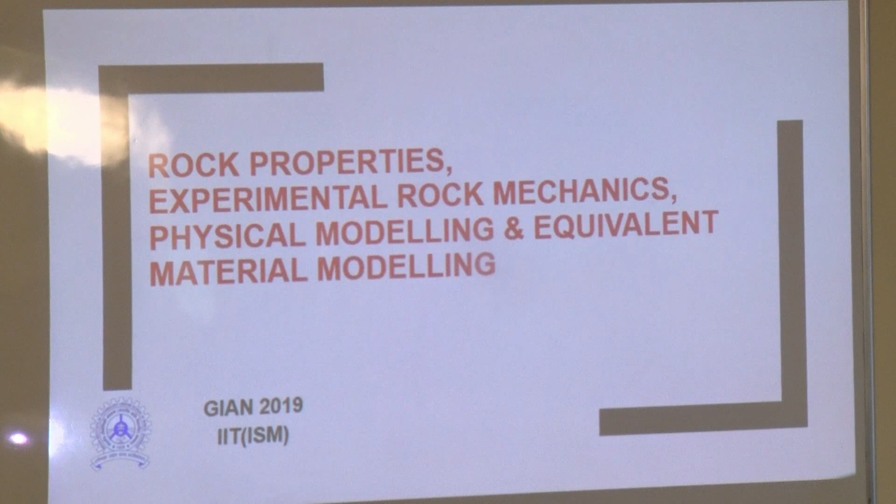This is our second lecture. This lecture we will concentrate on rock property. What is rock and what are the rock properties? Because in rock mechanics we need to know the behavior of rock in different conditions - different stress condition, different thermal condition, different electrical signal condition. That is mostly what geophysicists are dealing with. So before moving to that, we want to get a glimpse of what is rock.

I am a mining engineer, so we will deal with the rock that we generally mine: coal bearing strata, country rock, and different open pit and underground mines. In India, majority of our reserve is coal, and coal has a bearing country rock of shale and sandstone. So if we want to mine a coal mine, we need to know the behavior of coal, sandstone, and shale, so that we can design accordingly.

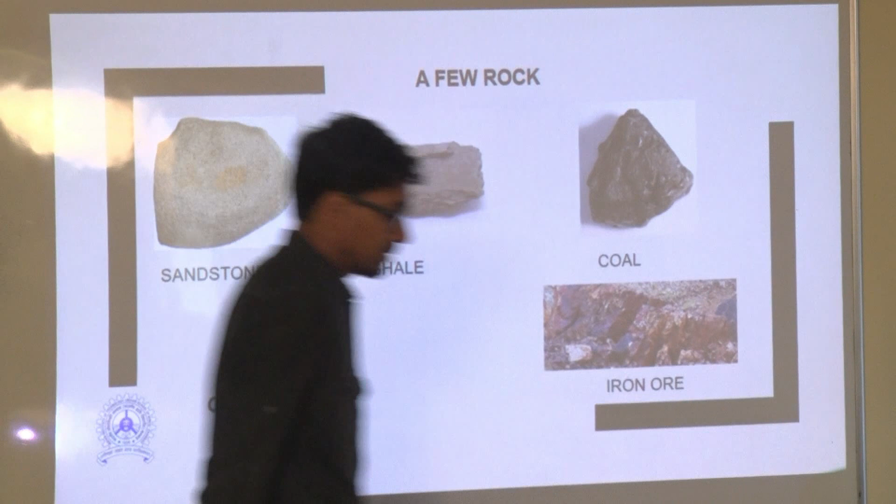Because when you do mining, you need to erect a new structure on rock. So you have to interact with the rock with machines, drilling and blasting, explosives, and numerous different mechanical procedures. So it is very essential for our rock mechanics course to know the rock.

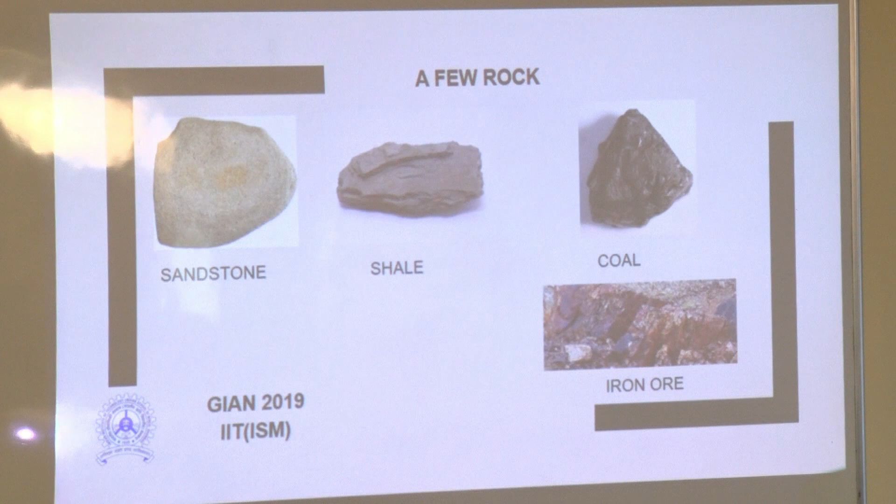That primary work for this task is done by the geologists. They collect rock, they detect what type of rock it is, what type of possible behavior the rock will have. So that task is generally done by the geologists.

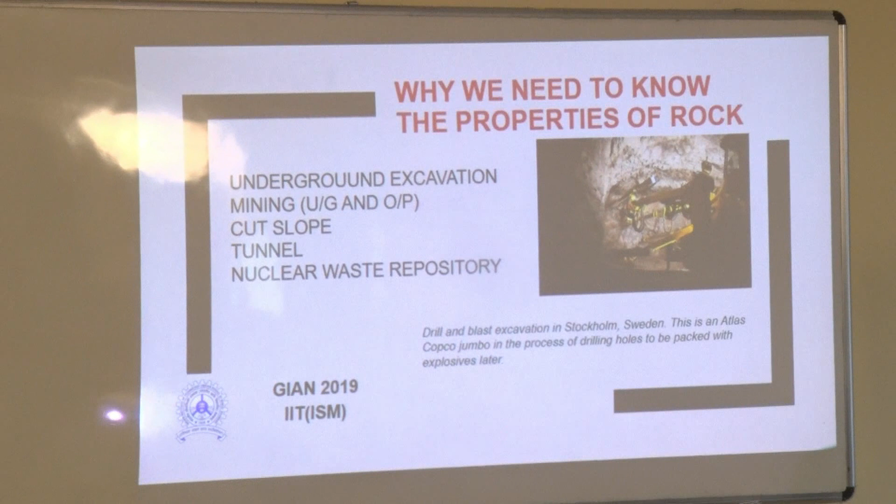Now, why do we need to know the properties of rock? In mining, we need to build underground excavations. This excavation may be used for nuclear waste disposal as well as other waste material disposal. Not only that, but also for underground space reserve. So to build the underground space or excavation, you need to drill.

So you need to have an idea about the hardness of the rock. When the drill bit cuts, what will be its performance, how much it will advance at a daily rate, which type of explosive you will use, whether it is a hard rock or soft rock, or whether the rock bearing strata has presence of water. Based on that you will design.

So it is very important for which purpose you are going to use rock mechanics. Based on that purpose, your different procedures will change.

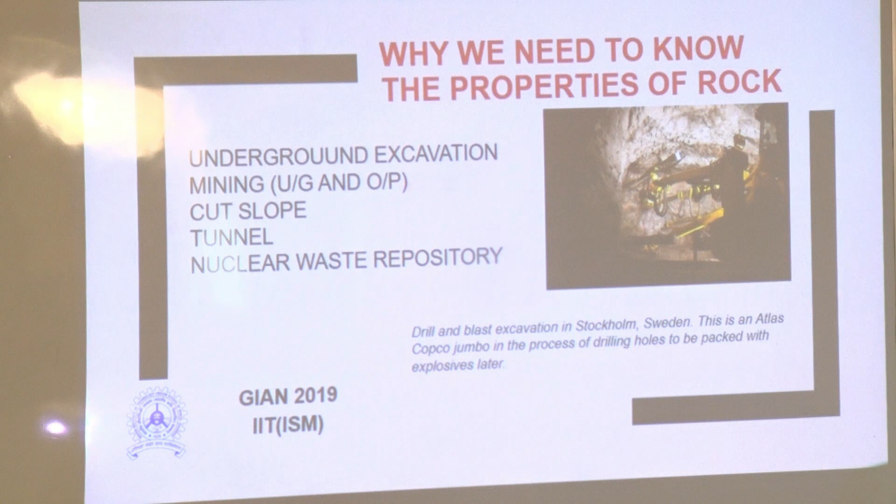Second, in mining, majority of the ore is extracted by open pit mining and underground mining. Open pit mining is from the surface itself - you excavate the material using drilling, blasting technology and different mechanical procedures. The surface miner is one continuous mining method used in open pit. Continuous miner is used underground, and there are different rock cutting instruments used in underground as well as in open pit mining.

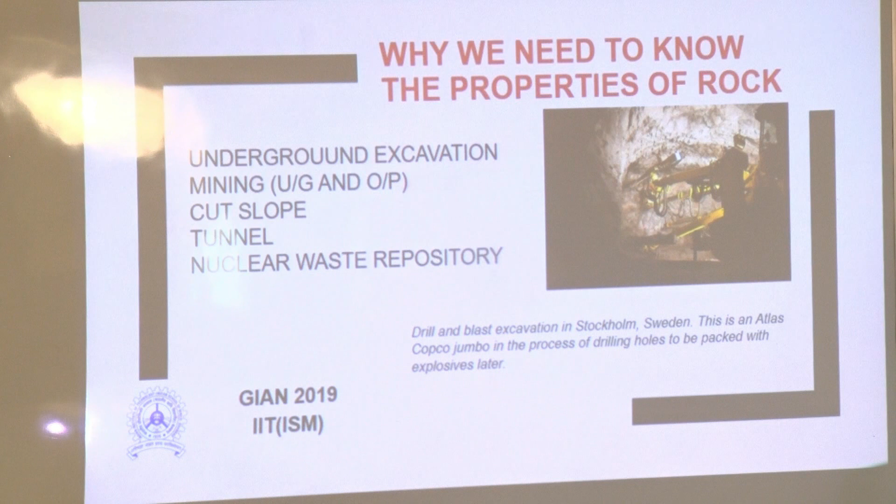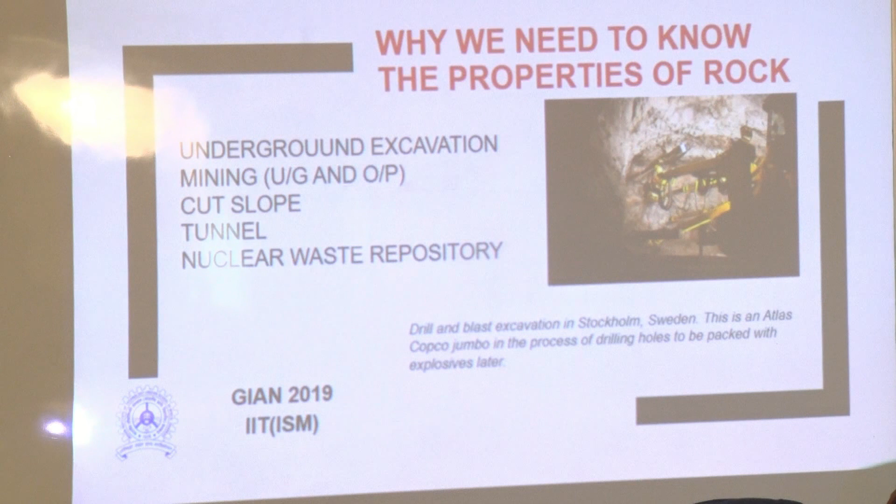Third, in majority of the Himalayan region there is a problem of slope stability and slope hazards. When we build a national highway along the Himalayan range, we have to design the cut slope. Whether the cut slope will be stable or unstable depends on the designer - how you blast it, how you design the slope. For that also you need to know the mechanical behavior and response of rock under different conditions.

And last, as I have already told you, the nuclear waste repository is a very important study. It has been done by different countries to know the rock behavior under different temperature conditions, because rock behaves differently in different temperature conditions.

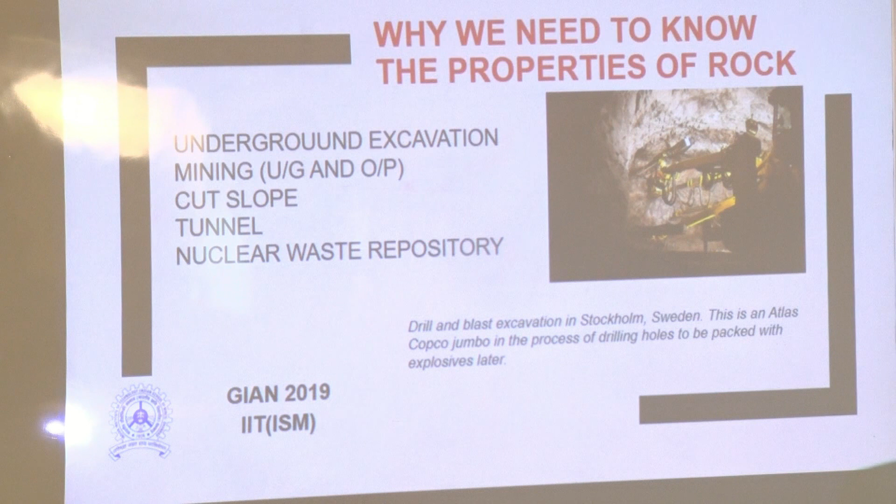In coal mining, in this procedure, we drill and blast, then muck the material and transport it to the surface. In that procedure, we need to design the gallery through which we approach the mineral - meaning the path or road. That gallery should have some amount of breadth, width, and height.

So the design will be based on the rock behavior and rock characteristics. We have already laid down different regulations that will dictate what should be the size and shape, but that is basically based on the rock parameters. So to design an underground mine, you need to know the mechanical behavior, and that is why rock mechanics is very, very necessary in that condition also.

Now, these are the aspects a mining engineer deals with, and that is why they need to know the mechanical behavior of rock in different conditions for their urgency, for their requirement, and to fulfill the industry requirement. And we all know coal supplies the majority of the energy in our country. So that is why performance, production, efficiency and safety of the coal mines is very, very necessary, and rock mechanics will help you to design these.

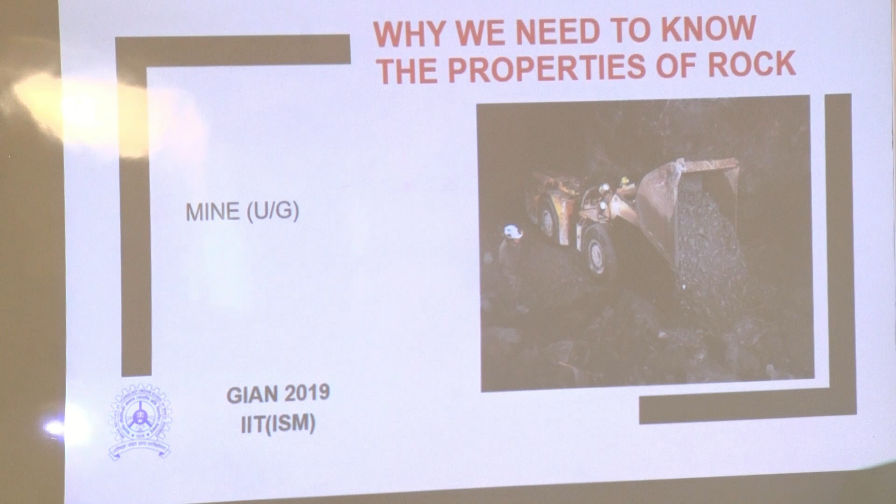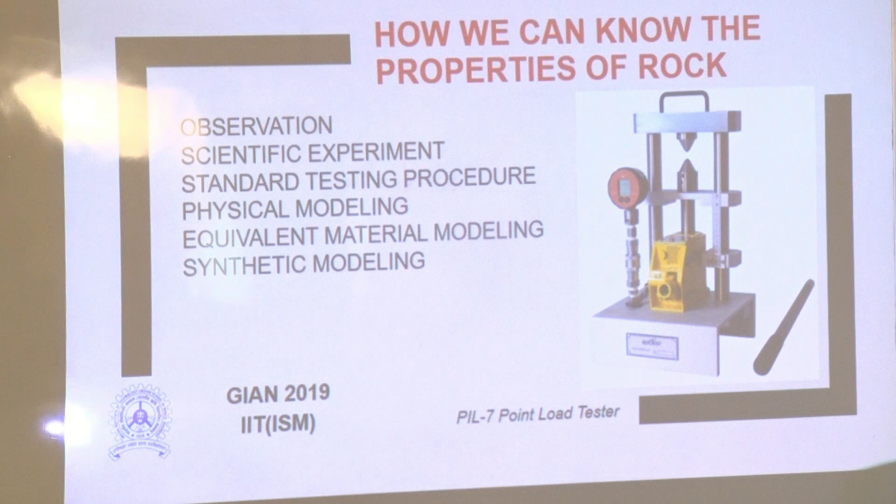I will show you one picture. In mining, there is a general practice. Mining sardars and mining engineers carry a kind of rod, basically a lathi made of wood. When they are going through the path, they strike the wall, they strike the roof, and feel the sound. Sound tells something about the rock. Rock behavior changes over time. So observation is very, very important.

Because in the first class you have already seen rock behavior when material is ductile or brittle. In brittle it is very difficult, but in the ductile case it deforms slowly. So definitely there should be some manifestation, and that manifestation may be in the form of sound waves. Some creaking sound may come, and very good engineers can feel the sound: yes, there is some cracking sound, means there is some process of cracking going on.

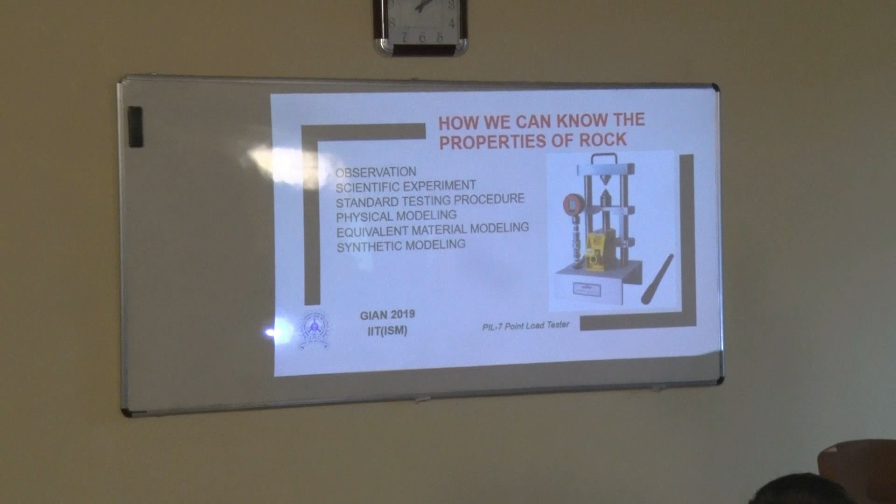Not only that, when people examine the wall of a mine gallery and observe some spalling material coming off, they will predict that this pillar, this wall, is already under stress. If it is not under stress, the wall should be very smooth. Material already spalled means this portion is under heavily loaded condition that the rock cannot bear. So these observations are very fundamental for rock mechanics engineers. You need to develop that eye, those ears, to observe the behavioral changes of the rock in different conditions.

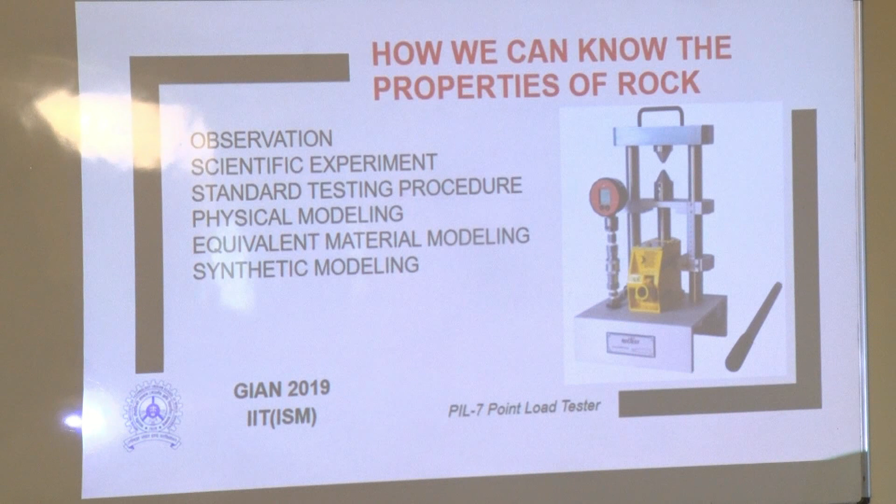Second, this observation will tell you something about the characteristics of the rock. Then you need to test, because testing is basically a tool to help you know the characteristics of the rock. Generally, we test materials. Suppose we test our blood to know whether my fever is due to some virus or some bacteria, and the test confirms, yes, your fever is due to malaria. So that test helps you diagnose what the problem is.

Similarly, for rock, a scientific test procedure will help you know the internal properties of the rock. So this testing procedure should be very scientific, meaning there should be some causal relation between the cause and its manifestation. That procedure should be very rigorous and reproducible. What I test in this place and what I test in Calcutta, both test results should be the same.

And for this, throughout the globe, there is a uniformity of opinion. That is why standard procedures have been developed, and ISRM and ASTM are among them. They provide manuals on how to test rock in different conditions, what precautions and care you have to take, and what the limitations of those tests are. These standards will tell you about this.

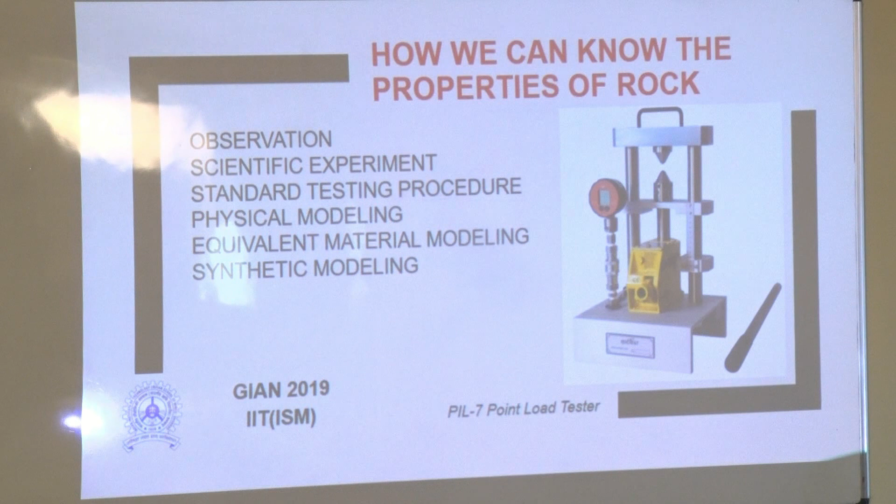So this is one of the machines to test the point load. Generally engineers always carry some rod while they are visiting an underground cavern or mines, to test whether we are moving through a safe zone or a very susceptible zone. So sound will speak everything.

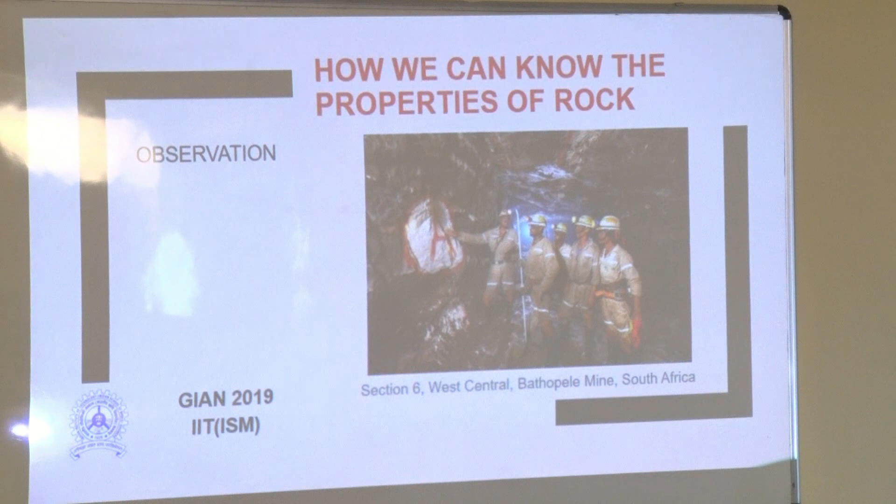Now, from the observation, what engineering perception will we get? Generally in rock, we have already learned that rock has undergone different stages of stress and strain for millions of years. We do not know. But some process the rock has undergone means there should be some amount of signature. Fossil is that kind of signature; it will represent how many million years, what type of species was there. Similarly, this kind of orientation of the rock will give you an indication of what kind of stress and strain the rock has undergone.

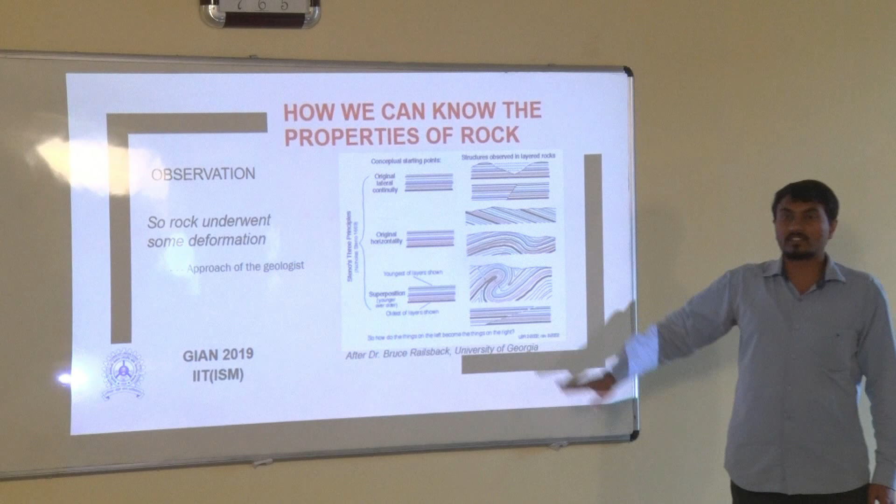So the geologist's interpretation would be, yes, rock has undergone some amount of deformation. Which direction, they will find out, then based on that they will classify whether it is anticline, syncline, dike, fold, whatever. So the geologist's role is very, very important in rock mechanics. Geologists, mining engineers, civil engineers can play a collective role for the development of rock mechanics.

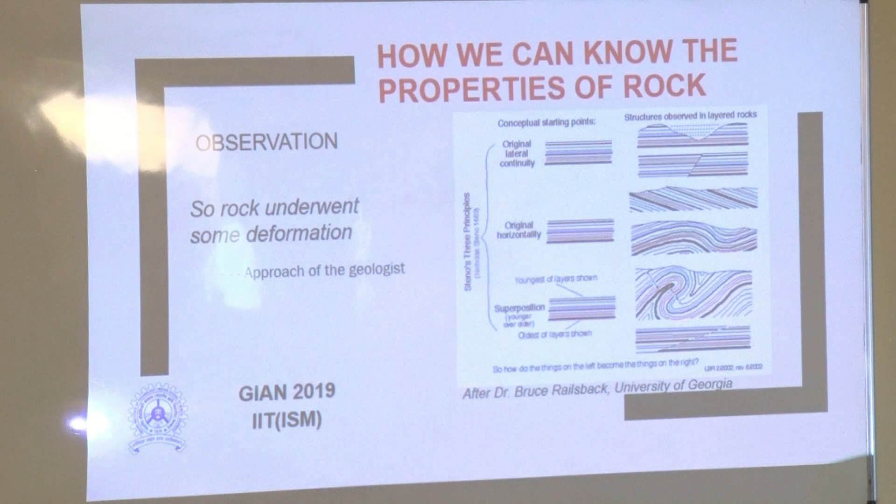But what will mining engineers and general engineers do? They are basically looking after the magnitude and the direction, because the direction is very important. Because when we erect a structure, the structure should be oriented in such a way that it will fall in a favorable zone. So, as an engineer, we are always looking after not only magnitude, but also the direction.

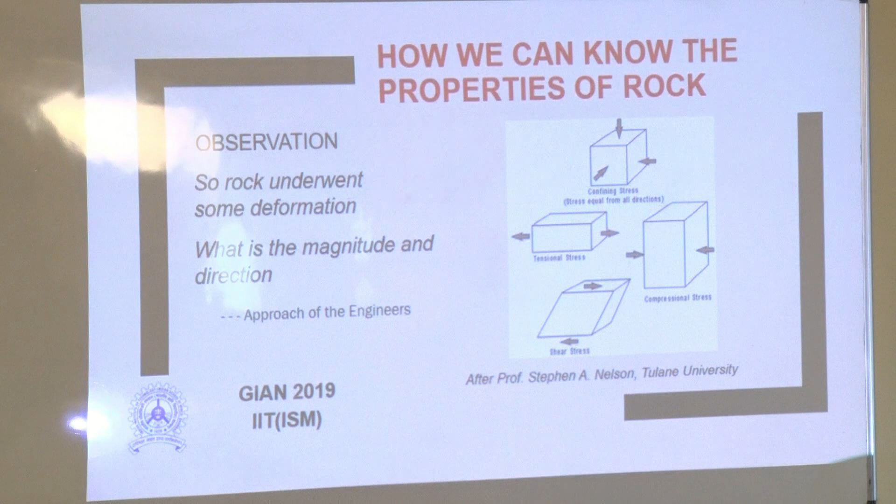So, as an engineer, our geometrical conception should be very clear, 2D as well as 3D, so that we can visualize how a rock block will behave in different orientations. So, this is very, very important from the observation part as well as from the engineering point of view. So, the second point I have already dealt with.

We have the blue book, orange book from the ISRM where they have laid down different testing manuals. We have the soft copy. If you like, you can collect it. And tomorrow when we visit our laboratory, we will show you different testing methods, at least a few.

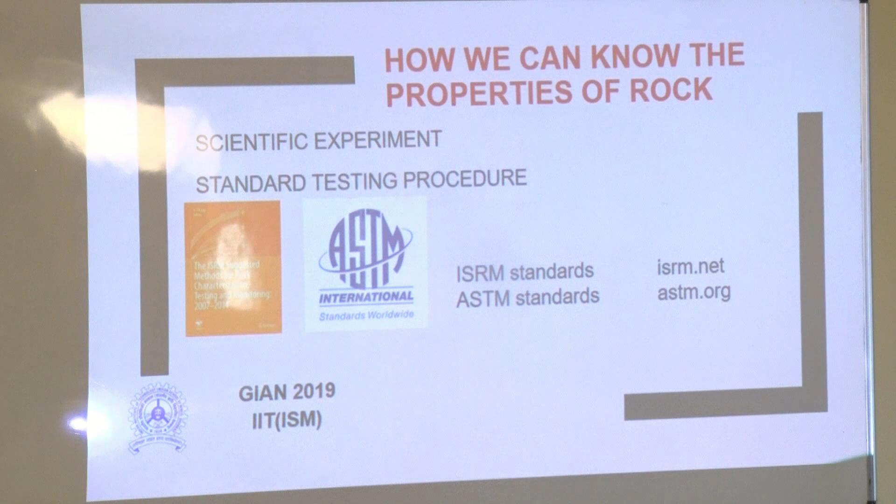But in this testing, there have been many controversies for many years. What should be the size of the samples? What kind of machines will you use? What should be the stiffness of the machine? Based on that, you will choose the rock and test the rock on that machine. What should be the ratio of the length to diameter? So, there were a lot of controversies for a long time, and we finally came together with a uniform decision that we will maintain an L by D ratio greater than 2.

So, these conclusions have taken a lot of time. Experimental rock mechanics has played an important role in coming to the conclusion of what should be the ideal size to test the rock. So, all that we are learning is actually the result of the labor of 40 years, 50 years of different people.

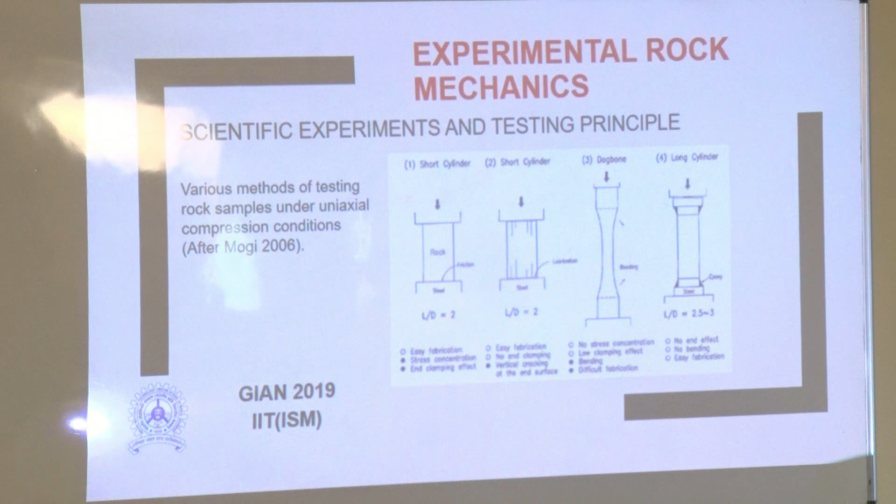So, in this aspect, in rock mechanics, we have to determine, we have to estimate different parameters. And we know that rock is not homogeneous. So, rock is anisotropic. So, as anisotropy increases in different directions, your different constants also increase.

For a perfectly isotropic rock, you have to determine only two constants; Young's modulus and Poisson's ratio are sufficient. For transversely isotropic, 5 elastic constants are sufficient. For orthotropic rock, 9 elastic constants you have to determine. For general anisotropic, 21 parameters you have to determine to characterize the rock.

So you can understand, as the regime changes from isotropic to anisotropic, you need to know more and you need to characterize more parameters. So your testing procedures should be such that they can determine all these kinds of parameters, and that will answer your requirement.

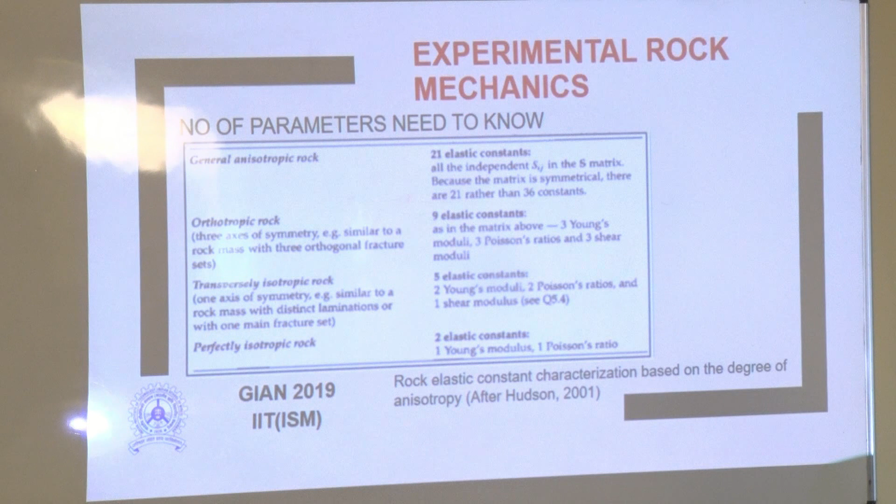So one of the earlier approaches, from the mineralogical conception: when people study the rock, they determine the strength of the rock and correlate it with the mineral composition. Suppose it is an iron rock, hematite, whether the mineral composition has some influence over the strength. So it is basically a correlation, an empirical approach. The constituent material has some influence on the strength of the rock, for example whether the presence of silica has some role on the overall strength of the rock.

People have found that there is a good correlation between these mineralogical constituents and the strength of the rock. So this kind of empirical approach was used for many years in rock mechanics as well as by geologists to classify the effect of different mineralogical constituents on the strength of the rock. But nowadays we use it very little, because a lot of good machines have come out and we find out different characteristics of the rock directly.

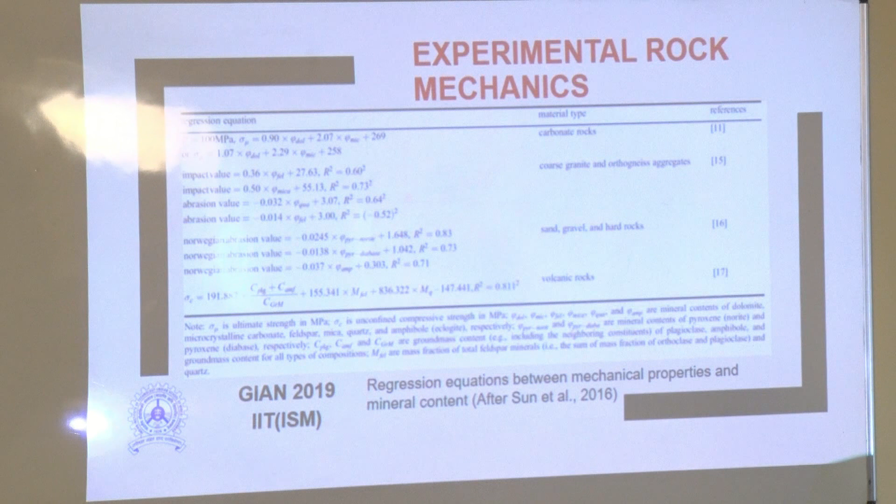So to test a rock, you need different machines. Generally in our laboratory, we have UTM, most probably 50 ton. We have MTS, we have direct shear, we have a hydrofracturing sample facility. We have some instruments for determining the in situ strength, and we have a few apparatus related to rock and soil, that is overburden characterization, to determine the hydraulic conductivity, that is permeability, and many more.

And in the rock excavation laboratory, we have different setups to determine the rock hardness and structure hardness, and to determine the behavior of rock under P wave and S wave. We determine the elastic constants under P wave and S wave. So we have many facilities in our laboratory. A few we will illustrate tomorrow, and the rest you can just visit.

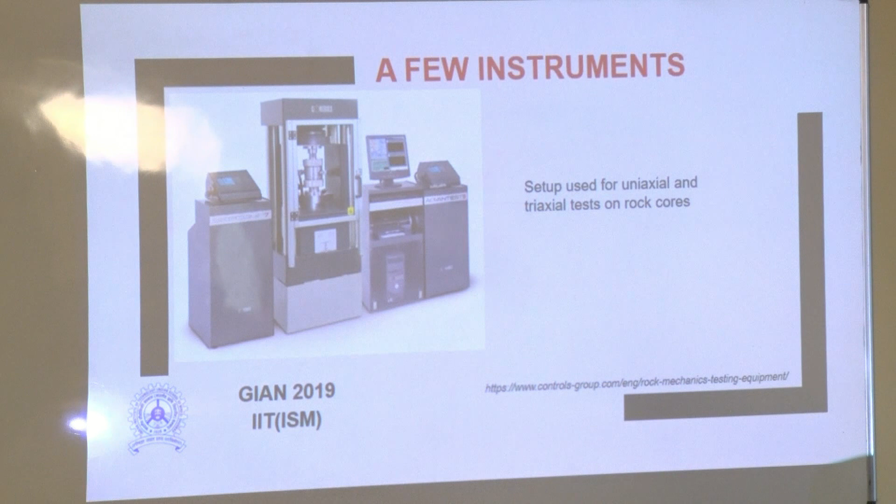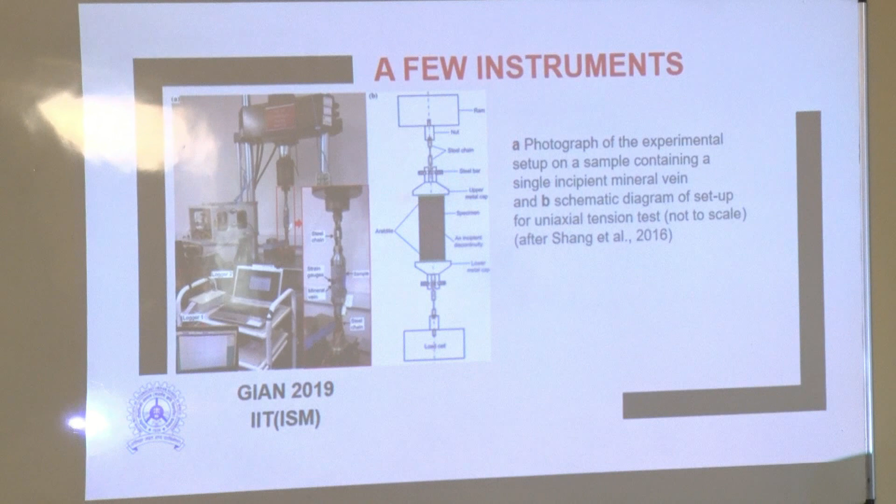And nowadays, one work I have seen, published in 2016, has also tried to fabricate a possible uniaxial tensile setup for rock. This is very important, because one major problem is that rock is very susceptible in tension. Rock cannot take much tensile load. So generally, earlier, in a Mohr-Coulomb curve, from the left side portion, that is the negative portion, we used to calculate the tensile strength of the rock indirectly.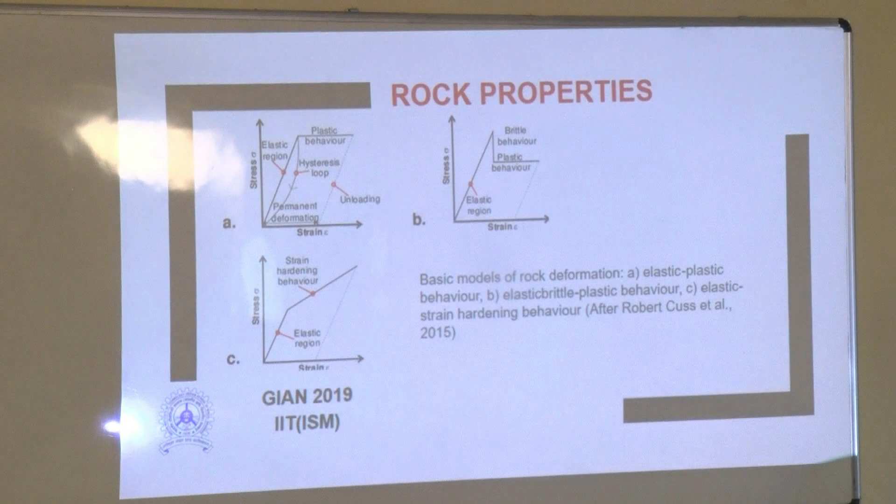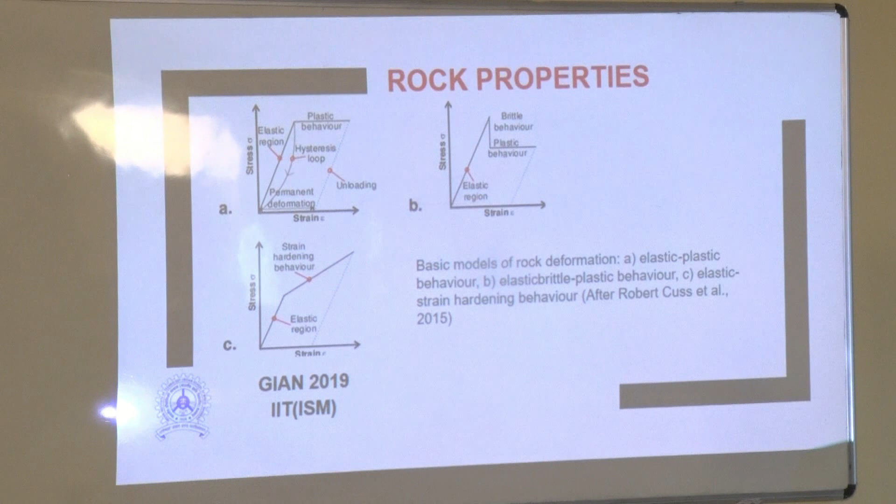Now in laboratory tests, as results we get different kinds of curves: stress versus strain. A stress versus strain curve basically represents a locus of behavior. Generally, with a locus, what we do in coordinate geometry is try to find out the rule of that point, how it is changing in different space, x, y, z or x, y. Then if we can establish the equation of that curve, the behavior is known.

But for rock, this kind of locus is not uniform. We have already seen there are 5 to 7 stages. So at different stages, at different points of time, rock behaves differently with different loading conditions. That is very important to note. Second, different theoretical approaches are available. Theoretically, we know that if rock behaves like this, it is elastic. If it behaves like this, it is brittle. If it behaves like this, it is ductile.

So mostly what we try to do with this stress-strain curve is fit it to this kind of classification: whether my rock is in the brittle category or in the ductile category. If it is in the ductile category, then for the design it is very good, because it will take a large amount of load without any sudden failure. So for an engineer, ductile material is very, very helpful for mining.

In the roof, if it is brittle, then there is a good chance of failure. And not only failure, many different mining consequences may come, such as coal dust explosion. Due to a huge amount of load and some temperature change, devastation may occur in a mine. So we need to know what kind of behavior your rock is showing in different testing conditions.

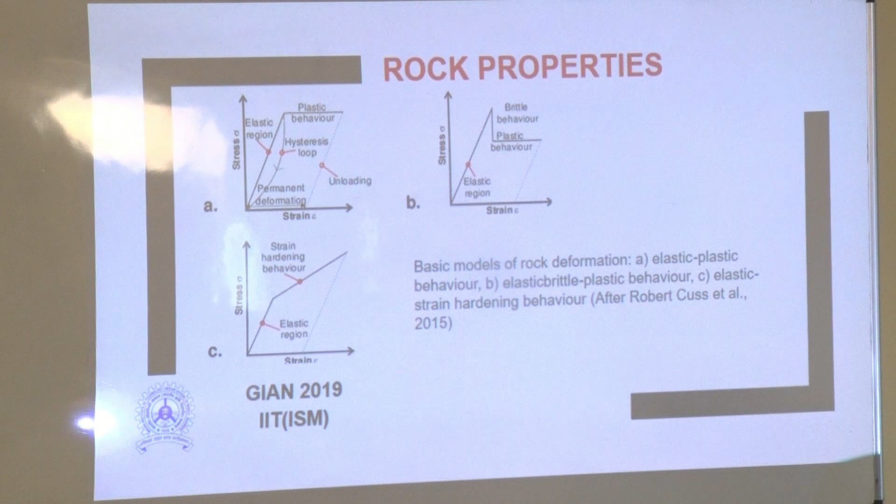The rock, as I have already told you, behaves differently in different temperature conditions. This temperature condition becomes very important when you go very deep in the mine. For instance, what we are recently experiencing in HZL in Rajasthan, a mine now working at 700 meters. They are planning to go to more than 1000 and 1200 meters. And we have earlier experience in Kolar Gold Fields. It was 3.2 kilometers.

So the geothermal gradient plays a very important role for those mines. Not only that, for those mines in Kolar Gold Fields, they used to design a central AC plant because the temperature is so high a man cannot work. So humid, so high temperature, a man cannot work. So to bring the mine to a working condition, they used to plan a central AC. So at 3.2 kilometers, you can understand how important a role temperature plays.

So you need to characterize the rock in different conditions in the laboratory also, to simulate the actual condition, because at 3.2 kilometers the rock may be under that temperature. So you need to have a very good idea how rock will behave at that temperature, and you already know the amount of stress that can develop at that particular level. You know the overburden pressure; based on that you can design.

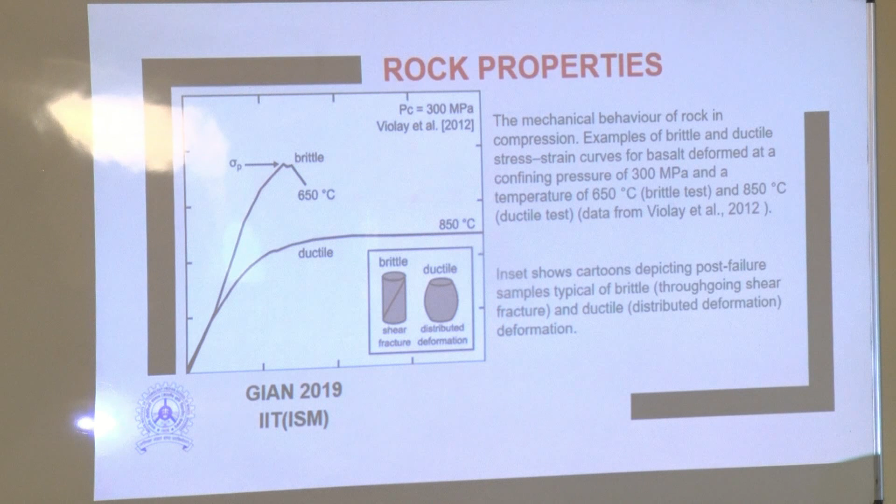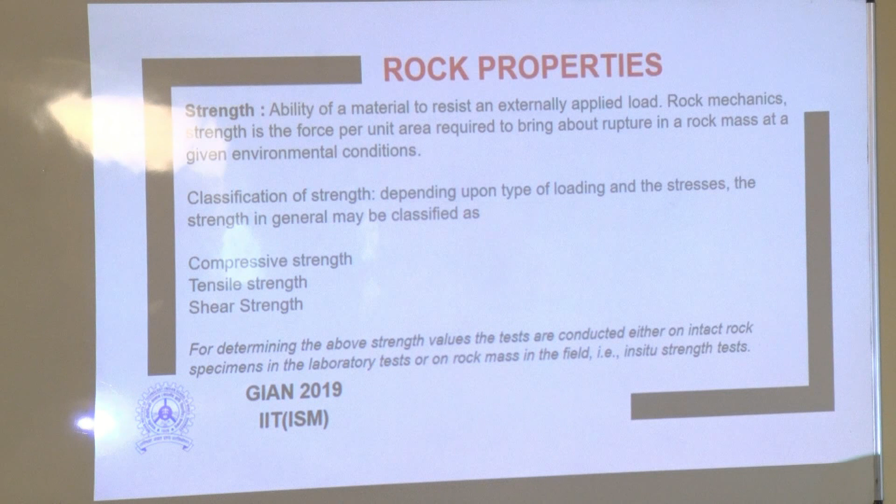So this mechanical testing procedure in the laboratory may not be sufficient to know the characteristics of the rock. So you need to take some other help. One kind of help is physical modeling. In physical modeling, as I have already told you earlier, suppose you want to determine what could be the influence if my joint is oriented at 30 degrees, 32, 33, 35, 40 degrees, one joint set. If it is a multiple joint set, two or three, or even a ubiquitous joint set, the joints are in different directions or all directions.

Getting that kind of rock in the field is very difficult. Getting the rock you need to know the rock behavior in different joint conditions, it is very difficult to get that type of sample. To overcome that, engineers have fabricated a physical model. Material near to the rock was fabricated in a cement manufacturing factory, with different orientations of discontinuity based upon the demand of the laboratory, and they prepared samples with different orientations of joints. This is one kind of physical modeling. We did it in our laboratory also, and our earlier researchers have also done it.

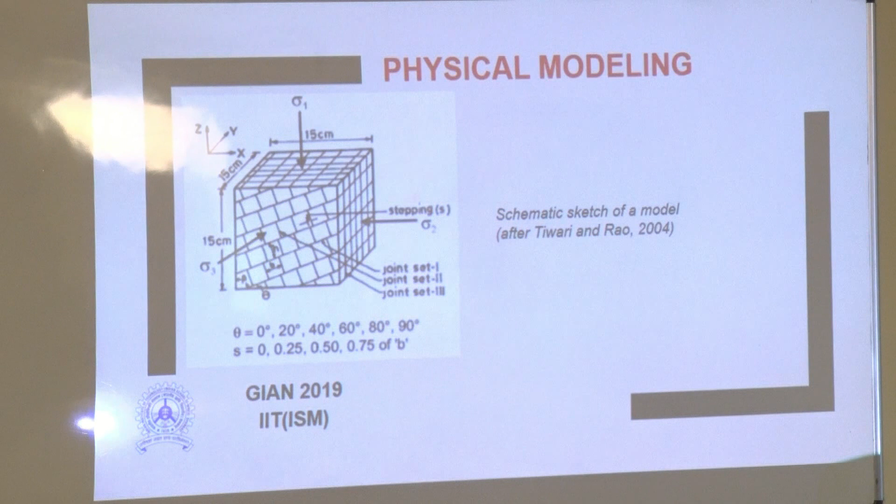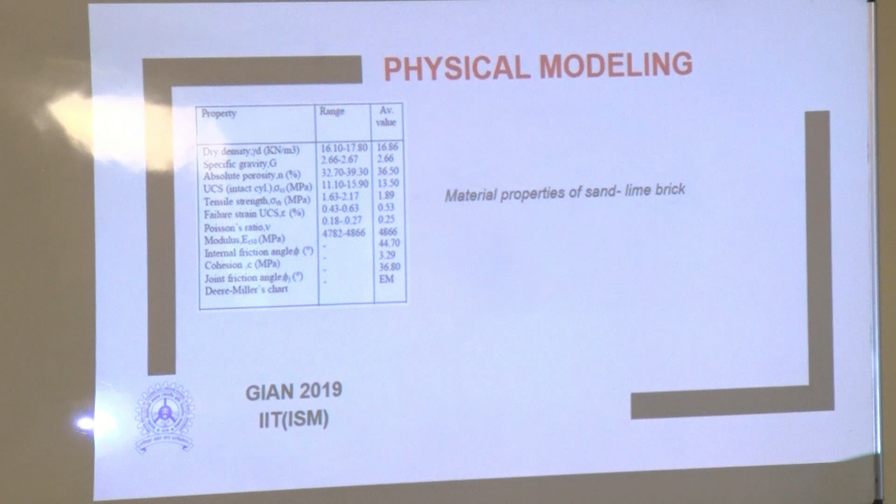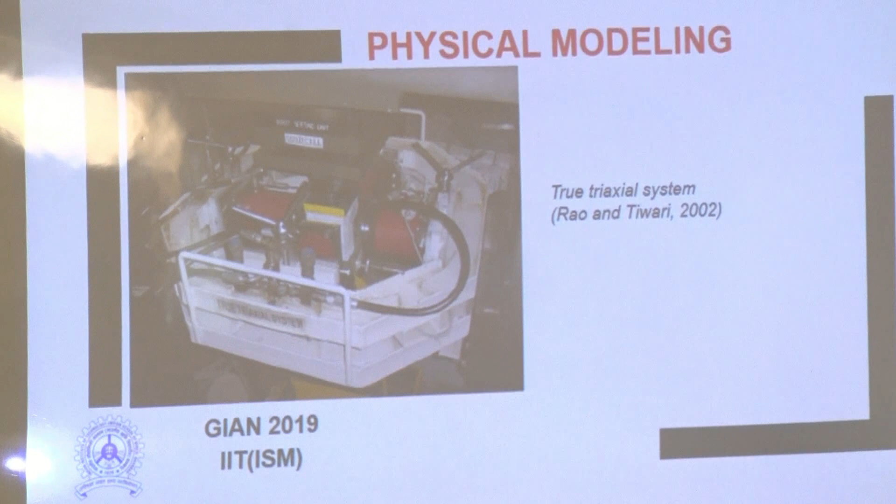So the purpose is to pinpoint what would be the influence of joints in different orientations of the rock in the field. What you are testing in the laboratory is not rock, nor is it the actual joint. You know from the field that the joint orientation is like that, so you have artificially fabricated it in the laboratory and tested with similar kind of material. They chose material near to the rock and reported this facility they developed. This is in our IIT Delhi, under Professor Rao. They developed this kind of facility to know the stress-strain behavior of the rock under different joint conditions. This curve will tell you the possible behavior if the rock has the same kind of joint.

So this physical model will help you. Without directly testing the kind of rock you are going to face in the field, you have done tests in the laboratory beforehand and you know what could be the possibility. In that way, physical modeling will help you greatly. But there are different problems in this testing procedure. The problem is whether we have accurately taken care of the material ratios, because you are not taking rock, you are taking some other material. You are not taking the real joint; you are taking an artificial joint, but the orientation is the same. So there are some questions, doubts, controversies, and nowadays it is not a very used technology for characterizing rock.

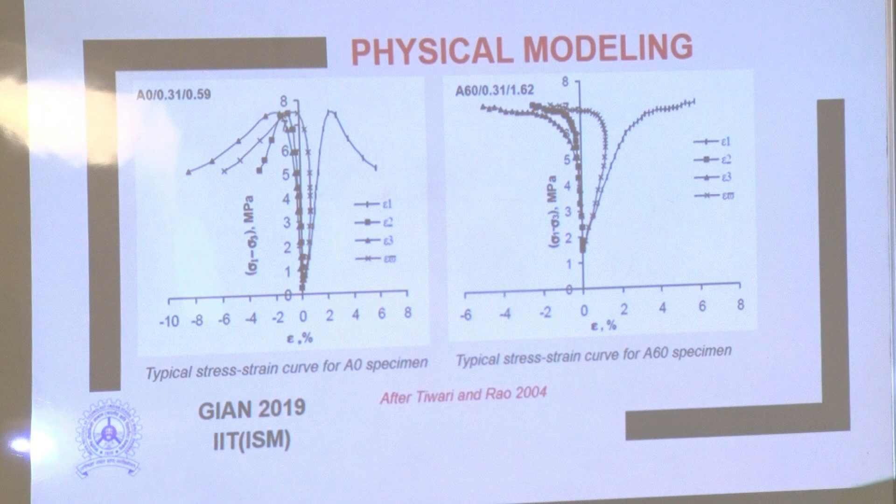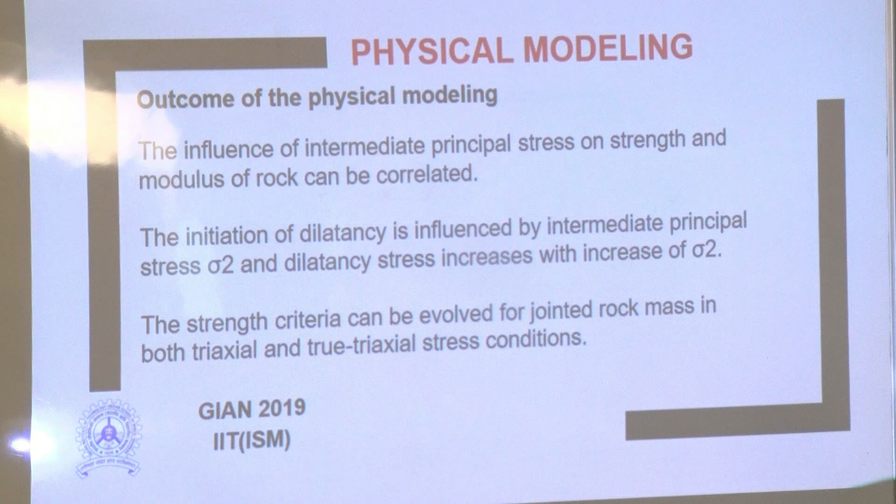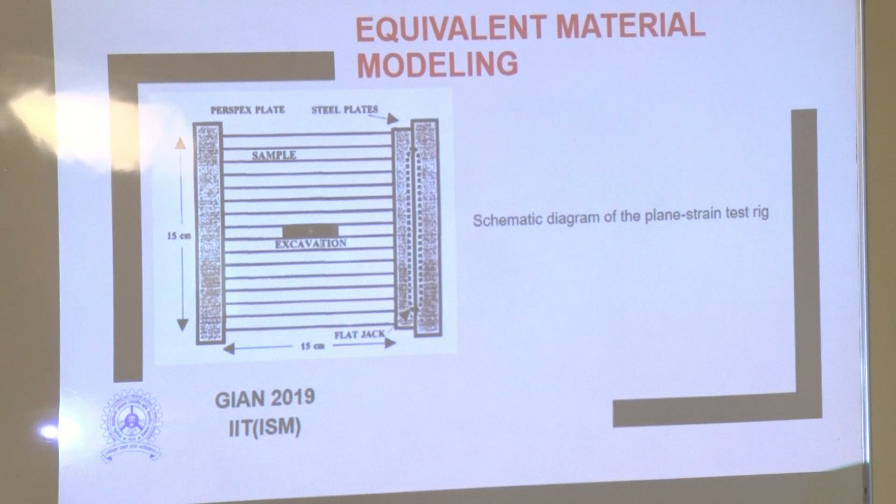So that is why the interpretation of this method is not sufficient to characterize the rock. To overcome this, people have thought of equivalent material modeling. One of the best models of this kind of equivalent material modeling is for a mine.

Suppose for a mine, nowadays we are working 250 meter or 300 meter. In general, we have 400 meter open cast mines. So 400 meter open cast mines means 40 number of benches, each of 10 meter height. If you visit the mine from the top, you will feel this kind of feeling develop, because I was there for 1 month in 2017.

What I saw, the hard rock strata in HZL, they maintain the benches nicely. The problem is, they found that they cannot go more than 400 meters. Then later on they switched over to underground mining, and now they are doing that.

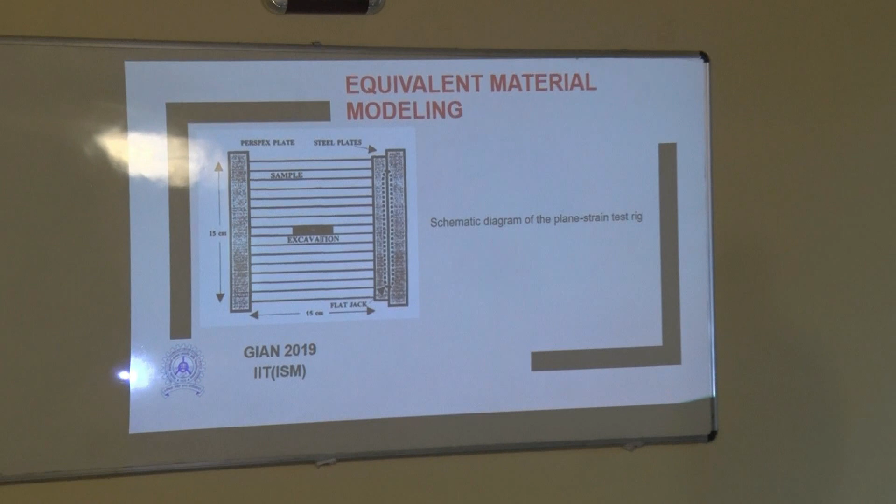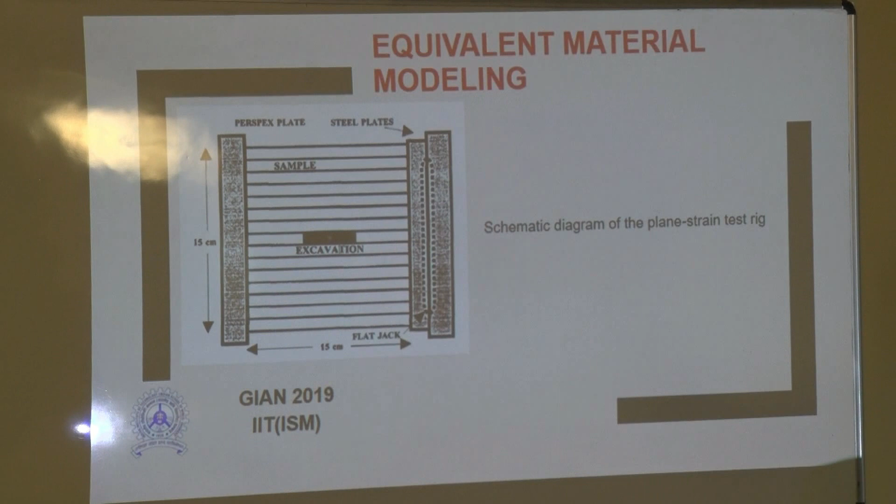Now in equivalent material modeling, what we used to do earlier in the laboratory is fabricate using plaster of Paris. We know plaster stiffness and the rock stiffness, so we generally reduce all the parameters by scale. Suppose 10 meter is the height of the bench, so we usually cut 10 millimeter bench to represent 10 meter. Likewise, we used to design the mine.

Then what we used to do, suppose there is dumper movement, many dumpers will move. Then we used to give weight slowly and slowly. Static weight first, then we try to monitor what kind of deformation is developed in the bench.

So you have already scaled down the parameters. Rock parameters are scaled down to plaster of Paris, and the geometrical parameter is also scaled down to the actual prototype model you developed in the laboratory, and you test what the possible kind of behavior is. So this kind of method gave some good results initially.

How? Suppose when the dumper is moving, dynamic load is applied. So wherever, at what type of crack or what type of failure is developed, that will hint you about the actual mine, in similar conditions, so you will take care of those benches. So in that aspect, this equivalent material modeling will help.

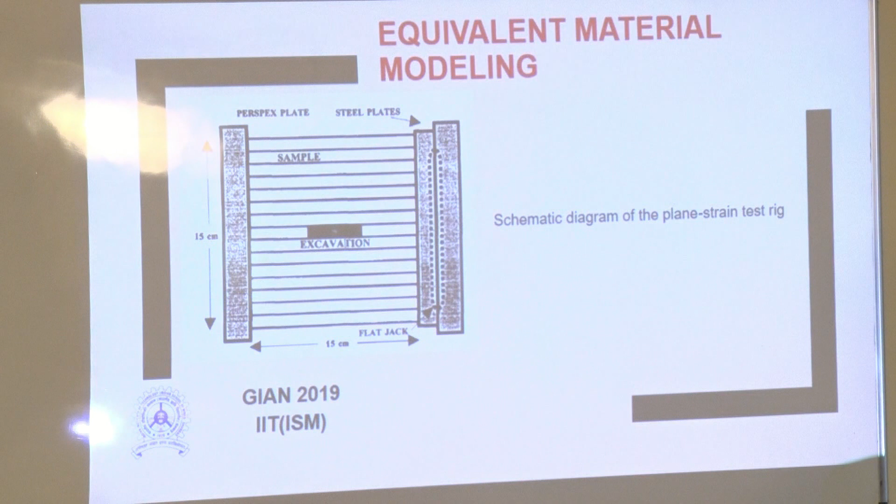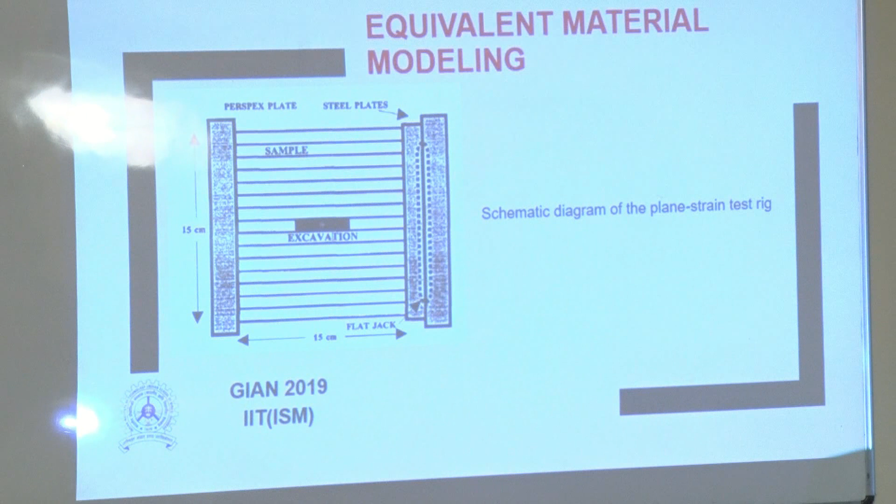In other ways, earlier what we did with the Perspex sheet, we used to apply a hole. Then we used to apply some amount of load on the board in the perpendicular direction as well as in the horizontal direction, and we test the Perspex sheet in different light conditions. If you study the Perspex sheet under different light conditions, there will be different contours of the line, contours of the light, because different light will diffract differently.

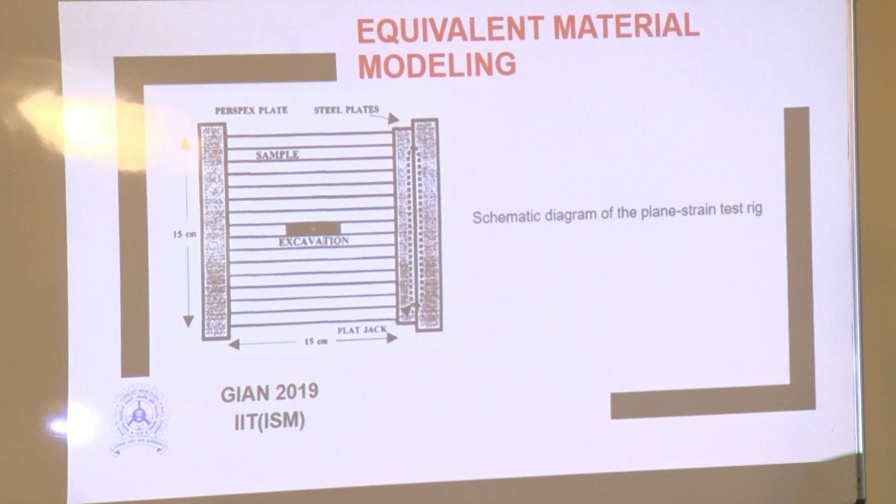So from that we can also determine the contour plot of the stress distribution in an underground tunnel - these were earlier approaches in equivalent material modeling. These also helped a lot to advance the knowledge about rock in rock mechanics. These types of methods were used for many years, basically plaster of Paris was used for many years to develop equivalent material models.

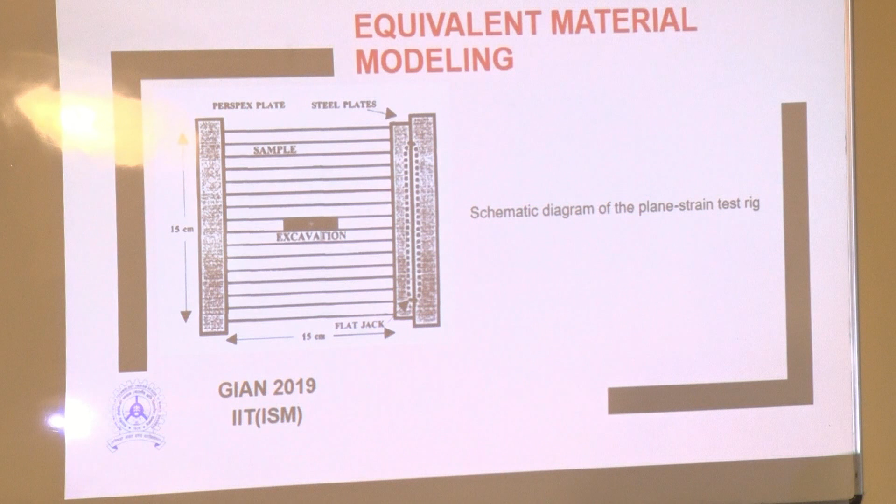And nowadays, what people are doing is a very fantastic job. They are taking equivalent material modeling with plaster of Paris, as well as using the computational facilities developed by different numerical methods - FDM, FEM, DEM. They are simulating the same type of material in the computer.

As well as they are testing the material in different conditions in the laboratory. So they are now trying to correlate the behavior of the rock - the equivalent material they are fabricating in the laboratory with different testing behavior - and the synthetic material taken care of in the computer. And they are matching whether the material they have chosen is behaving in a similar way or not. This is the latest trend different rock mechanics groups are trying to characterize the rock.

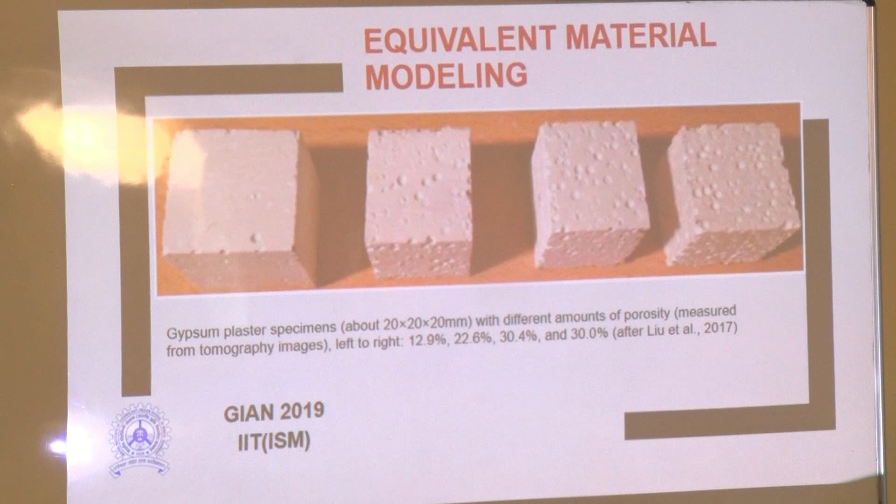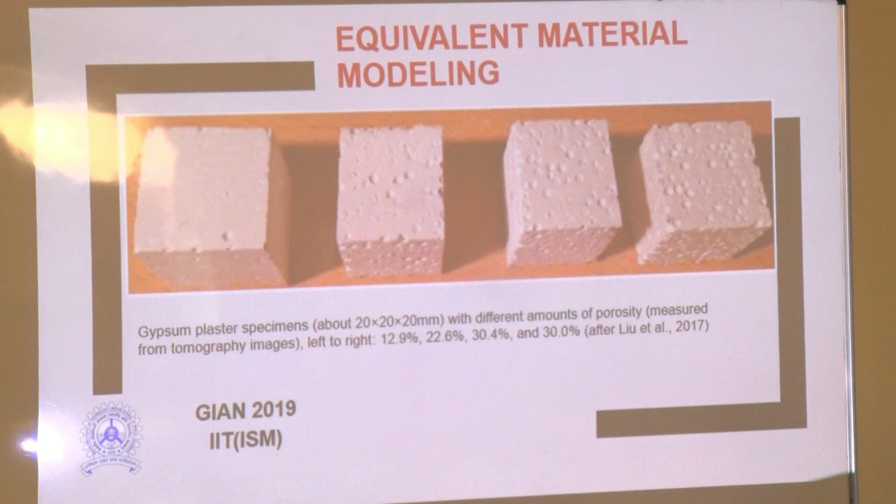The important observation here is the advantage of this kind of approach - you can artificially prepare a sample with a defined amount of porosity in the laboratory very accurately, and test it in different instruments available in the laboratory to see whether that porosity is okay or not. Then you test it in the lab, as well as develop the same kind of material synthetically and simulate it numerically, and see the behavioral pattern, stress-strain pattern of these two kinds and try to match them. This will help you a lot to predict the internal behavior of the rock.

So the outcome of this kind of procedure is that you are in a better position to know beforehand what could be the possible behavior of rock in different testing conditions.

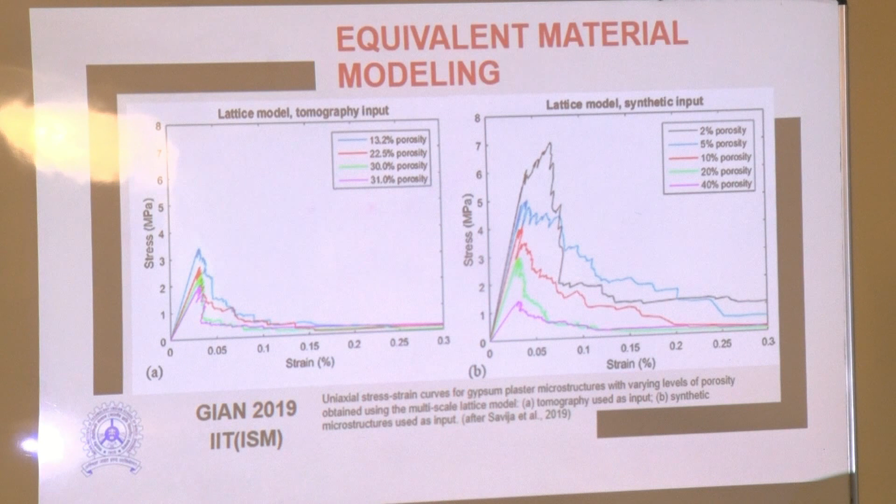The experimental approach of rock mechanics is to know the behavior of rock in different conditions, so that you are sure how the rock will behave. For that, your testing procedures, sample procedures, sample material constituents, and different physical properties need to be taken care of very precisely in these simulations. That simulation will help you generate the behavior of rock in different conditions. The outcome of this procedure is that you can precisely predict how the rock will behave and fail, and at what point it will fail.

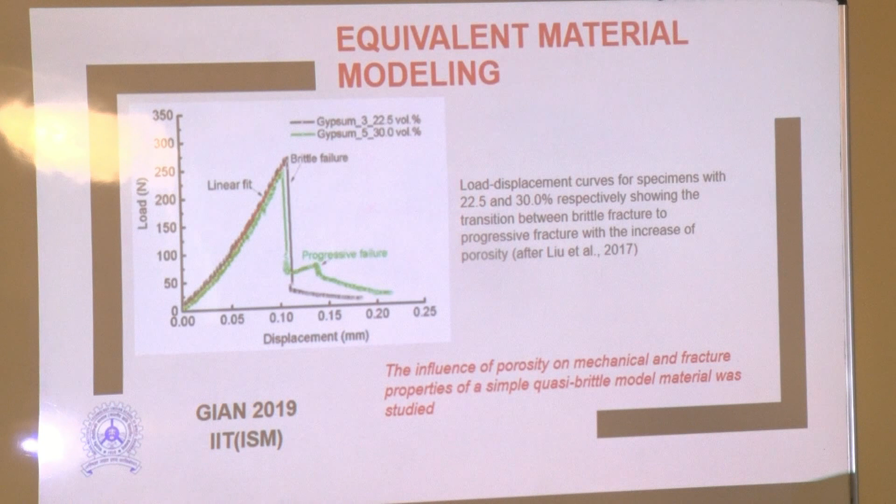As computational power advances, you can synthetically generate in the laboratory whichever complexity is possible, forming lattices, and try to formulate the behavior of rock at different conditions, whatever is desired in your mind for underground space exploration. That is all. If you have any questions, you are invited.

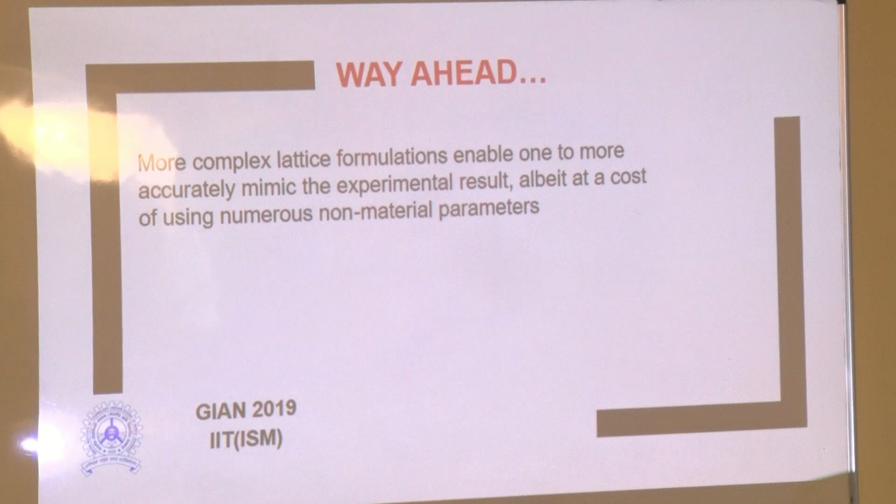There is a triaxial testing machine for testing soil, and here also there is a triaxial testing machine for rock. In soil, we measure the pore water pressure of a particular soil, and also the moisture content. The stress reduction is due to volume change of the soil, and this volume change is due to the expulsion of pore water pressure.

So here you are testing the rock sample—how is it measured, like whether the strength is observed when the particle is cracked, or how is it measured? Actually, in our lab, what we see in a triaxial test is there will be a bit of sound when the rock cracks. From that sound, you generally stop the machine movement of the platen.